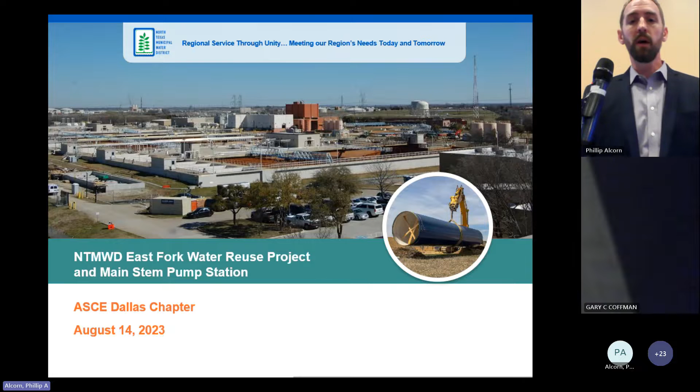So with that, as mentioned, I'm Phillip Alcorn. I'm with the North Texas Municipal Water District. We're here today to talk about one of our premier projects, the East Fork Water Reuse Project. But first, I'd like to orient you a bit to who we are at the district. We are a regional water, wastewater, and solid waste provider, serving approximately 2 million people and growing on the water system side.

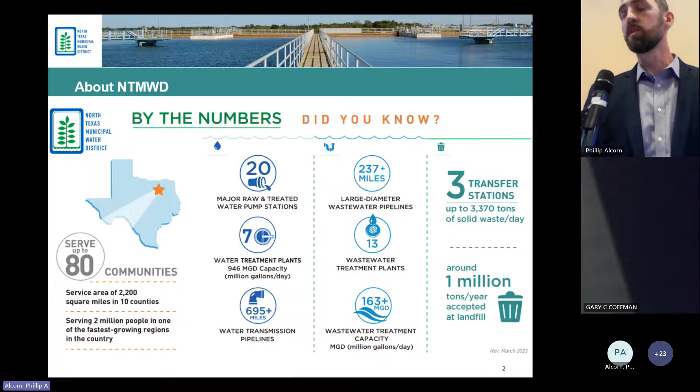So we serve mostly north and east of Dallas. I like this map because it provides a good landscape of who serves what. Dallas there in purple being central, our service area is shown there in green, again primarily north and east of Dallas. Also shown on this map are two other major water providers in the Metroplex, that being Tarrant Regional Water District there in blue, and then the Upper Trinity Regional Water District shown there in the hatched area.

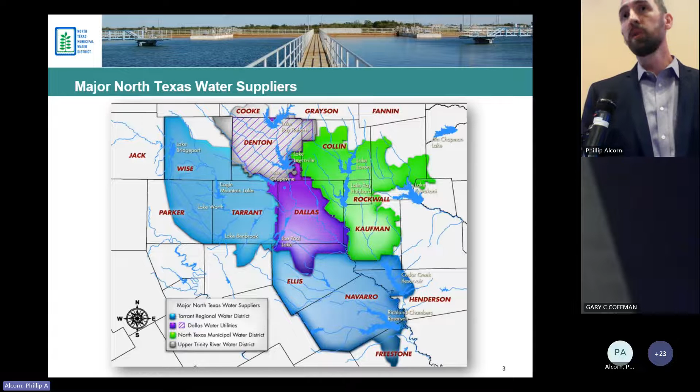We're probably most like the Upper Trinity Regional in that we are a treated water wholesale provider. So we treat water at one of 7 treatment plants and then deliver that to the member and customer cities that we serve, who then distribute that to individual homes and businesses within their service area.

As far as water supplies, we have reservoirs including Lavon Lake, Lake Texoma, Tawakoni, and Chapman Lake, from which we draw raw water supplies. Those are Corps operated and owned reservoirs. Our newest reservoir, which is owned and operated by the district, came online, began treating water this spring, and that is Bois d'Arc Lake in Fannin County to the north.

It's a really exciting project. It'll be a separate discussion, but that's the first major reservoir built in Texas in 30 years, so it's a very exciting project for us. Again, just came online treating water at our newly constructed Leonard Water Treatment Plant in the spring. But these are our water supplies in terms of reservoirs.

We also have significant reuse supplies, which is what we're going to be talking about today. As mentioned, that is reuse of treated wastewater effluent that is discharged into the East Fork of the Trinity River and the main stem of the Trinity River. We divert and then treat that through 2 pump stations and then at a constructed wetlands, which we refer to as the East Fork Water Reuse Project.

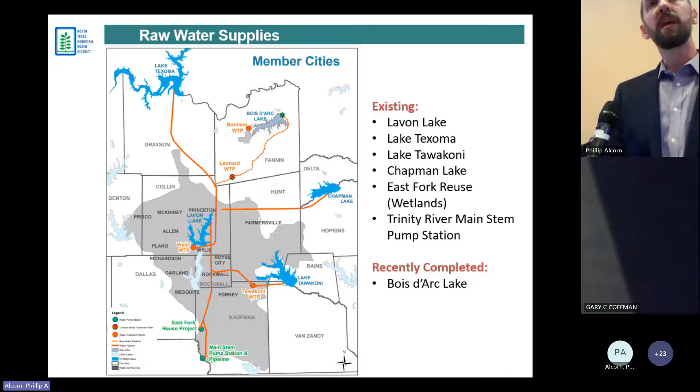I mentioned growing earlier, and we are doing just that. The entire Metroplex is growing significantly, has been, and does not show any signs of slowing down. For our service area alone, our estimates are we're adding over 55,000 people a year, and will continue over the next several decades. So we've got big challenges ahead of us as an organization for meeting water supply demand now and into the future. This East Fork project, which came online in 2009, was absolutely critical for us in terms of our ability to meet water demands at that time and into the future, especially with the recent growth we've seen over the past few years.

But I'll note here a few key points: we're currently serving over 2 million people, and we expect that number to nearly double over the next 50 years. Many of the cities that we serve, again north and east of Dallas, are some of the fastest growing areas in the country.

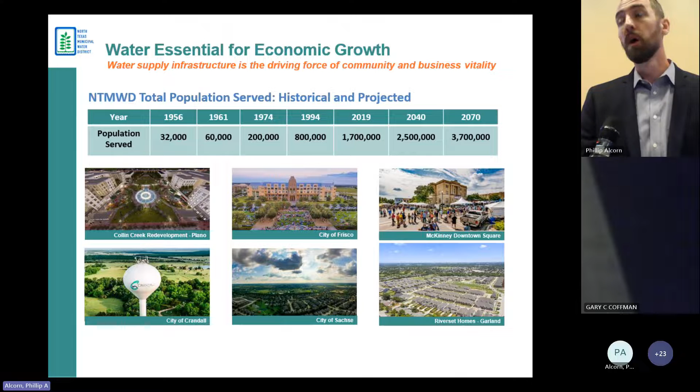We routinely see reports from the Census Bureau and other sources naming cities within our service area, and it's true across the Metroplex. So it's not unique to just us and our organization. But the water supply challenges are great for the Metroplex, and it will take a combination of solutions to meet those.

In the water world, we generally plan for a 50-year horizon. We undergo a regional and state water planning process that looks over that term. These numbers are from the Region C plan, the region which Dallas-Fort Worth lies within. These are Texas Water Development Board planning regions. As you can see from the most recent Region C plan, it's going to take a combination of water supplies to meet future projected growth and demands.

So, of course, new reservoirs like Bois d'Arc Lake will need to be constructed, but a significant portion of that future demand is going to be met through conservation and reuse, almost a third between those two strategies alone. It's a significant part of our portfolio and will remain so now and into the future as we look to additional reuse supplies moving forward.

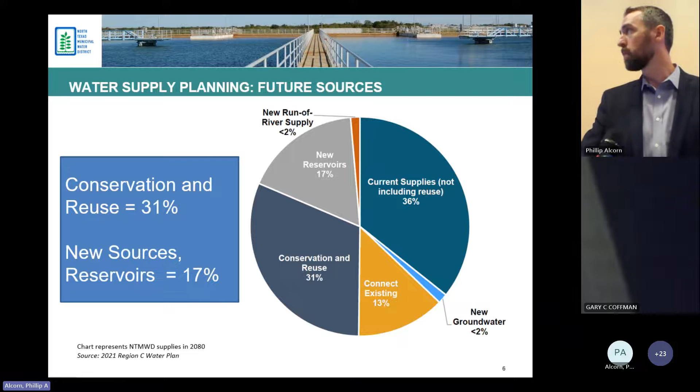It's owned and operated by the district, my organization, but there is a nonprofit center located within the heart of the wetlands. That's the John Bunker Sands Wetland Center, named for the individual who oversaw and owned that property prior to the district acquiring it, which is a really neat origin story for how the project came about.

John Bunker Sands is one of the individuals that's part of the family behind the Rosewood Corporation, and it was part of Rosewood's cattle operation, this property, prior to our developing it as a wetland. He himself had identified the potential for that site for wetlands development, and it was a fortuitous situation. We shared a common consultant that brought us together and ultimately led to our developing the project in partnership with the Rosewood Corporation before acquiring it after it was built.

This nonprofit center is really an extraordinary place. It's open to the public. Their focus is on education, both for adults, but largely for school groups. We have schools that come out regularly to visit the center and learn about wetlands, science, water supply, a range of topics. But it's also very popular with the birding community.

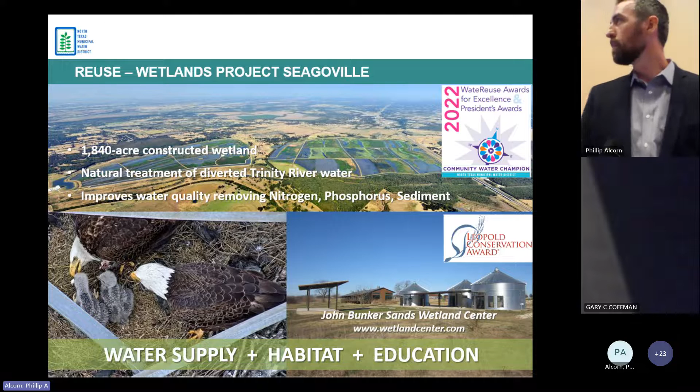So to orient you to how this wetlands operates in terms of water supply and what it means for us, you can see Lavon Lake at the top of this graphic. Below it, along the East Fork of the Trinity River, is Lake Ray Hubbard. If you follow that East Fork south, that's where our constructed wetlands is located. It's adjacent to the East Fork of the Trinity River, south of Ray Hubbard, but upstream before the East Fork has a confluence with the main stem of the Trinity.

We divert water directly out of the East Fork of the Trinity River into those wetlands, and those volumes are based on treated wastewater effluent volumes which are discharged into that watershed upstream. Those are facilities that we operate or have agreements in place with, but it's largely our service area, so it's water that we deliver that we're reusing after it's been used and treated at those facilities.

We also have an arrangement with the city of Dallas. For those facilities that discharge into Ray Hubbard, the city of Dallas releases those equivalent volumes downstream so that we may divert it from the East Fork into the wetlands.

We also recently completed construction on a new pump station on the main stem of the Trinity River. So in addition to diverting volumes from the East Fork, we also divert volumes from the main stem of the Trinity, pipe that upstream into the wetlands, and then all the water that flows through that wetland system, both from the East Fork and the main stem of Trinity, after it works its way through that system, is pumped up back to Lavon Lake. We pump that water into the upper reaches of the eastern arm, which allows time for that water to blend, and also additional detention time for treatment before we ultimately bring it into our water treatment facility located at Wylie.

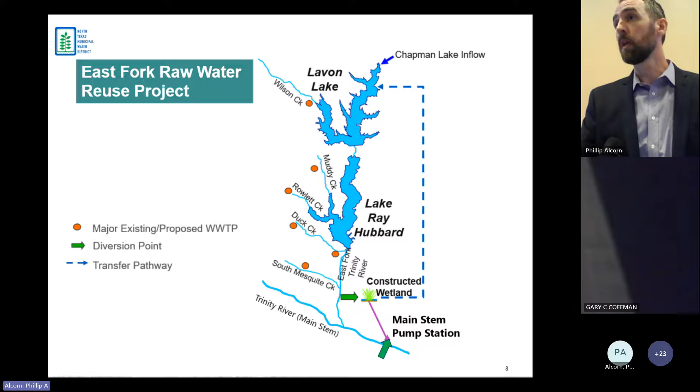So a bit about the main stem pump station. The wetlands have been online and operating since 2009, but this is our newest addition to that system. It was fully operational 3 years ago in 2020.

The distance between that facility and our East Fork wetlands is approximately 17 miles. It's over 40 miles that we pump it from the wetlands up to Lavon Lake. So we've got significant miles of large diameter pipelines to convey that raw water up to the wetlands, but also ultimately up to Lavon Lake.

As far as capacity here, this pump station can deliver just over 100 million gallons per day, but in terms of a reliable supply, it represents 50 million gallons per day. So if you combine that with what we can reliably divert out of the East Fork of the Trinity River, we can get a reliable supply out of this system of 90 million gallons per day. Now, that's what was the basis for the design for the wetlands itself.

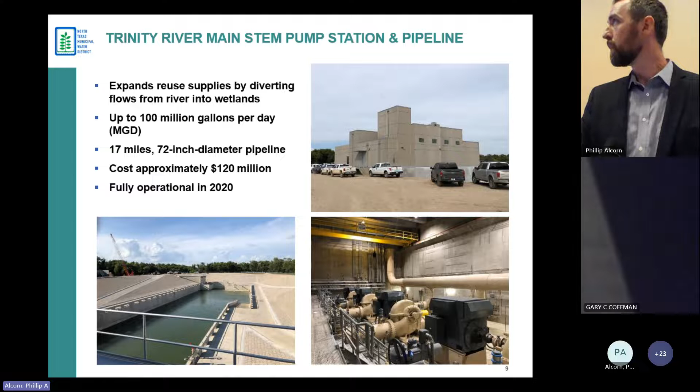A bit about water rights. So we have rights to those volumes in the East Fork, which we divert directly into the wetlands from the East Fork of the Trinity River. We obtain water rights to do that. It was actually based off of our water rights for Lavon because that's where the volumes are ultimately discharged to.

But there are some unique conditions within that permit that are intended to help ensure there are adequate flows within the East Fork of the Trinity River for the benefit of downstream water right holders, but also for biological and ecological purposes. So we bypass certain flows within the Trinity River Basin and also have requirements for maintaining flows within the East Fork and the main stem in terms of our pumping operations.

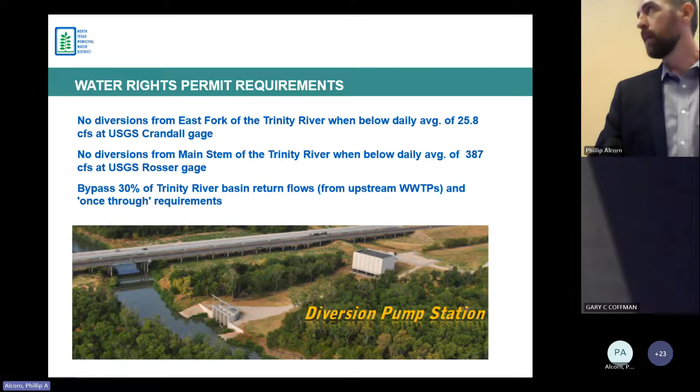So I like to show this slide. This is my last slide, but it really, in my mind, gives a good comparison and perspective for what this represents to us in terms of a water supply.

So the reliable supply I mentioned out of the East Fork project is approximately 90 million gallons per day. Compare that to the firm yield of Bois d'Arc Lake, which is our newest addition, our newest reservoir. That's the equivalent of another lake, and at a fraction of the cost, a fraction of the size, and a fraction of time to permit and construct. So reuse for us has been absolutely critical, but it's also been a very cost-effective solution to making additional use of our existing supplies and meeting those demands we're seeing within our service area.

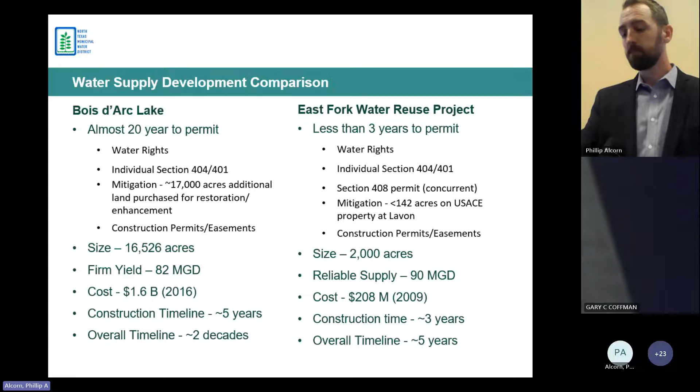And at this point, I'll transition to Loretta, who's going to talk about operation and maintenance of the system itself.

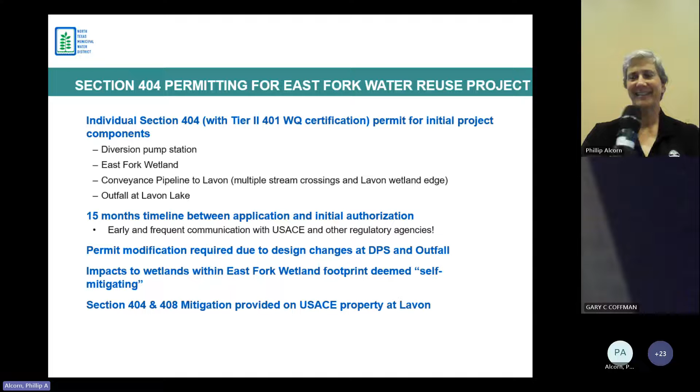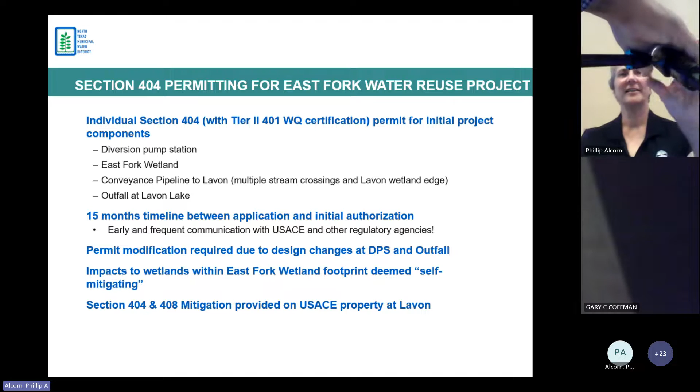First, I'm going to expand a little bit. Can you help me out, Paige? Testing, testing, testing. Okay, all right.

We're going to expand a little bit on talking about the permitting for the project. The initial project components, the diversion pump station on the East Fork, the East Fork wetland, the conveyance pipeline all the way back up to Lavon, and the outfall at Lavon Lake, the permit required was an individual 404 permit.

Of course, you have to have the water quality certification permit from TCEQ that goes along with that. It took us 15 months from the time that we actually submitted the complete permit application to where we had the permit in hand and were able to start construction. So we were working on all the permitting as they were continuing doing the design, and we're coordinating very carefully with the Corps and all of the coordinating review agencies during that time.

As soon as we got the permit, I had a couple of design modifications that the engineers had done and didn't bother to convey to me, that we had to do a modification of the permit because we'd been working so closely with both the Corps at the regulatory branch as well as with the operations people at Lavon. We were able to continue construction during that time while we were working on the modification of the permit.

The impacts to wetlands that were there on the ranch: Bunker Sands had already done some restoration and created some duck habitat cells. That's really what threw us into the individual permit. So we had quite a bit of marsh type wetland there that was being impacted. That was determined to be self-mitigating because that's what we were creating again with our constructed wetland was the marsh area. But we also had impacts to waters of the U.S.

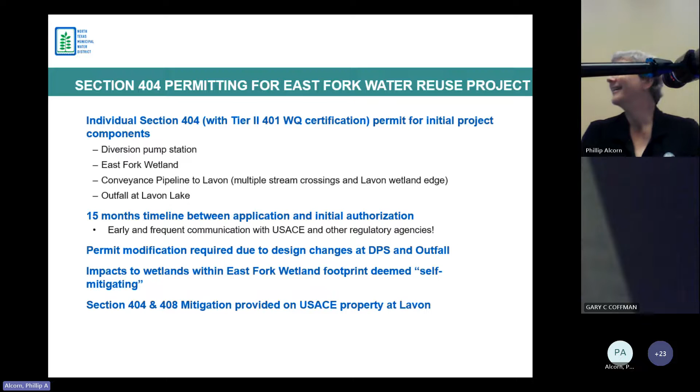Permit. That's required because you had crossing with the pipeline of the federal Corps flood control levees, as well as crossing with the pipeline on federal property up at Lavon Lake. So that was done concurrently with the 404 permitting, and we were able to do all that mitigation.

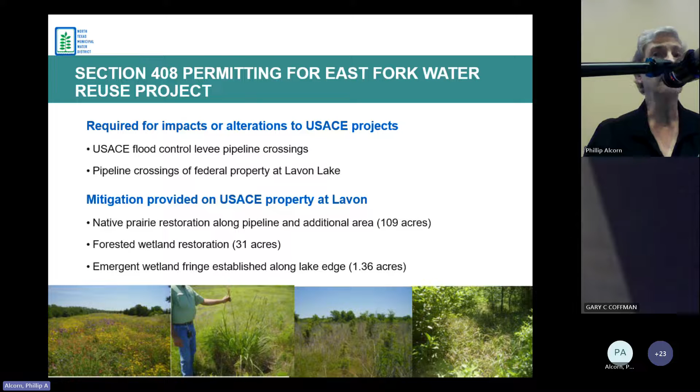The mitigation that we did up there at Lavon was native prairie restoration of 109 acres, as well as some forested riparian area wetland restoration along one of the drainages going into Lavon, and then a little bit of emergent wetland that we had to do within one of the cove areas. That was actually only a little over an acre, but it was some of the hardest mitigation to do because Lavon was about 15 feet below conservation pool at the time we started the project. We had to wait about 4 years before lake levels rose enough to where we could actually do some wetland plantings in that cove area.

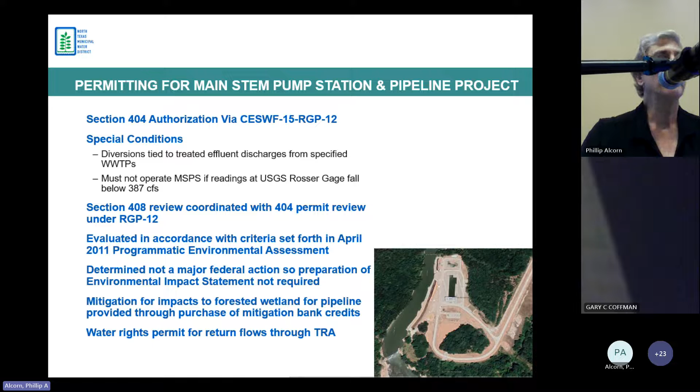We were able, with the Corps crossings of the Corps levee for the pipeline, to use a programmatic environmental assessment that the Corps had developed in 2011. So it was not a major federal action, didn't require us to do an environmental impact statement. In fact, they fairly streamlined it, so that part went through pretty quickly. We did have minor impacts to a small forested wetland along the pipeline route. For that one, we were able to buy mitigation bank credits.

Going back to the wetland, if you look at the site at the Seagoville Ranch where this was developed, this ranch had been producing crops and cattle for over 100 years. And that is something that, as we're out there, we recognize we really don't have much in the way of a seed bank, and we needed this project out quickly.

But one of the key things in looking at this site is when it was being used for producing all these agricultural crops, they'd actually developed agricultural levees around the north and central section, and then also had the Corps flood control levee around the south section. So there is some flood protection of the site. It's not 100-year flood protection, at least not on the north section, but we do have 10, 15, 25-year flood protection. We're not going to be flooding the wetland, which was critical.

You can see the distance and constraints that we had with the site. We actually have 3 different sections: the north section, central section, and south section that was developed.

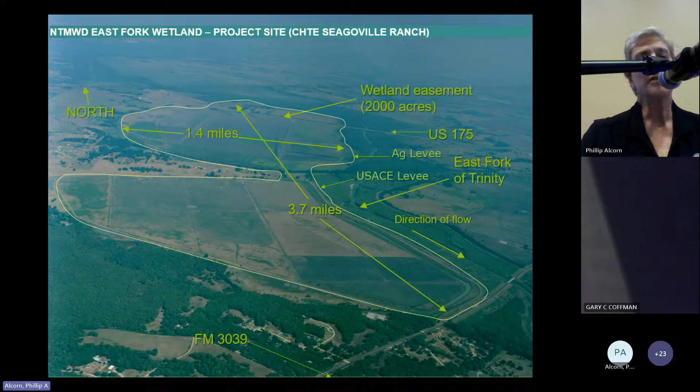The major project components included the diversion pump station on the East Fork Trinity River that Galen mentioned, the constructed wetland itself with 1,840 acres of wetted surface area within the 2,000-acre easement, the conveyance pump station that pumps water back to Lavon Lake, the conveyance pipeline of 43.5 miles at 84-inch diameter, the John Bunker Sands Wetland Center located centrally within the site where they do the educational component, and then the main stem pump station and pipeline that came on in August of 2020.

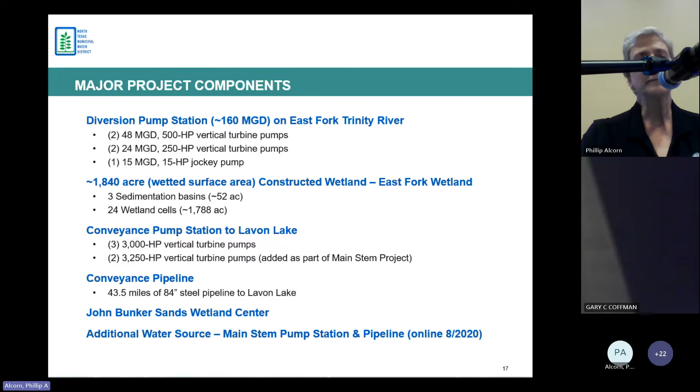You can see where the diversion pump station is on the East Fork Trinity River, and the water that comes from the main stem pump station comes just past that pump station, and both of them are commingled in the splitter box. The splitter box discharges to 3 sedimentation basins and then to 3 small wetland cells in the north section. That's gathered and has to be conveyed through culverts under Highway 175. It flows through the central section in 3 wetland trains, has to be gathered again into a channel, and then culverts under the Corps levee, then distributed to 4 wetland trains in the south section. Then that flows down into the holding pond at the conveyance pump station, where it's pumped back to Lavon.

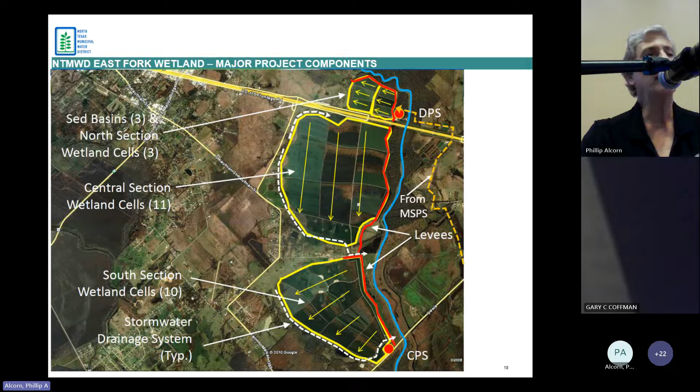Okay. Oh, I missed one.

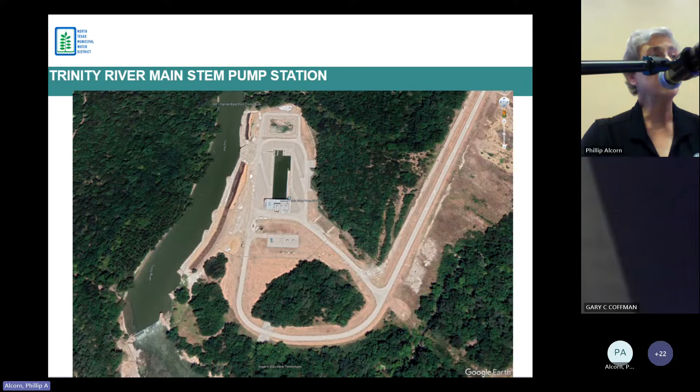This is just a quick picture of Google Earth from the main stem pump station. It's a little different, it has a forebay down there. Notice there's the lock and dam structure just downstream from the intake. This was a key factor in locating the pump station here, because that lock and dam maintains a steady pool in the Trinity River for the intake to be located within.

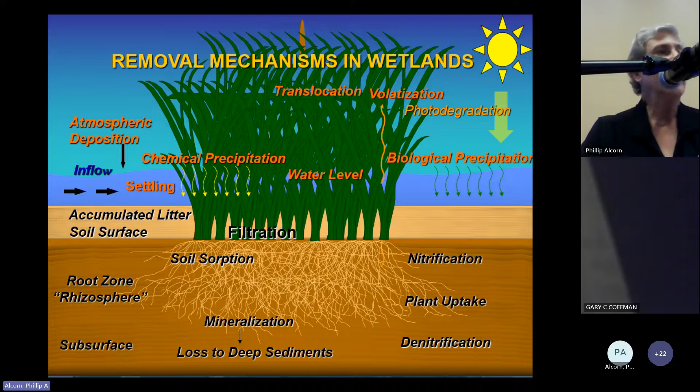Within the wetland, there are a number of different removal mechanisms that function synergistically to provide water quality improvement, primarily focused on removing suspended solids and nutrients, nitrogen and phosphorus. All of these actions work together, and sometimes separately, but sometimes things can happen within the wetland as well, which we'll talk about in a minute.

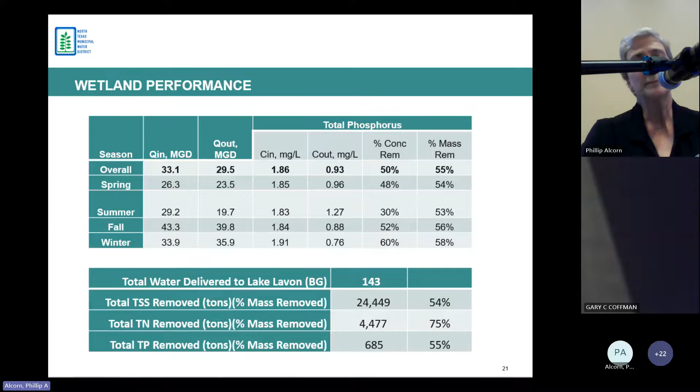People ask me, well, this is a natural system, so it really kind of operates itself, doesn't it? Well, yes and no. There is ongoing operation and management required within a constructed wetland. You don't have the concrete, steel, air blowers, and other mechanical things that you have at a conventional plant, but we do need to manage water levels within the cells to make sure we're not having adverse impacts to the aquatic vegetation. You need to manage the flow, balancing or proportioning between the trains so you're effectively using the treatment area, and you need to be monitoring water quality.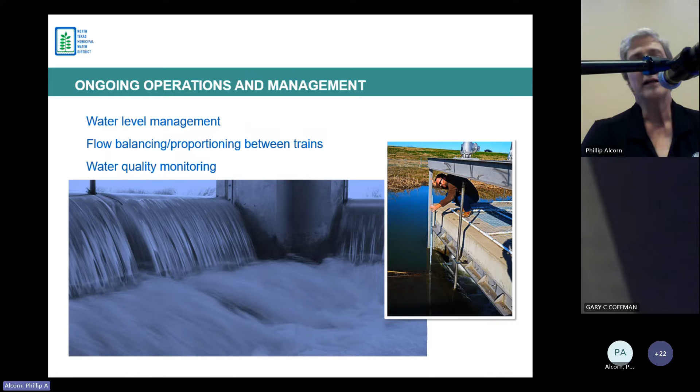Then you have vegetative cover. Again, the plants are a very key component of this wetland. They provide structure within the water column, as well as organic carbon for the microbial population to colonize and grow on. When we have issues or impacts to those plants, we do remedial planting, and that's something ongoing in different areas.

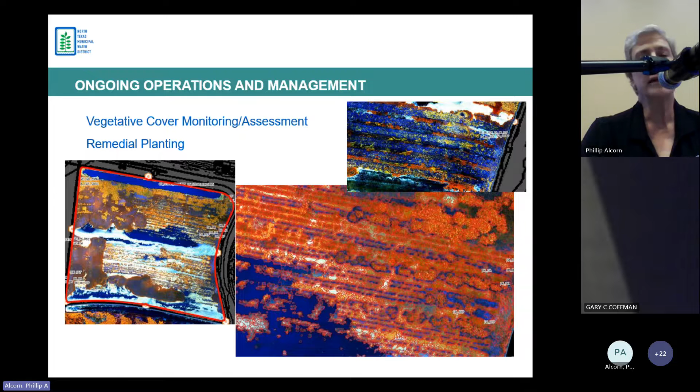For instance, where we have wildlife impacts, we have woody vegetation control. Willows and cottonwoods are really not desirable within the marsh areas because their roots can penetrate through the clay bottom, and they also lose a lot more water through evapotranspiration. In the wintertime, we do prescribed burns that remove a lot of the accumulated thatch from the tall plants, generating robust regrowth in the spring, which really helps pick up more nutrients.

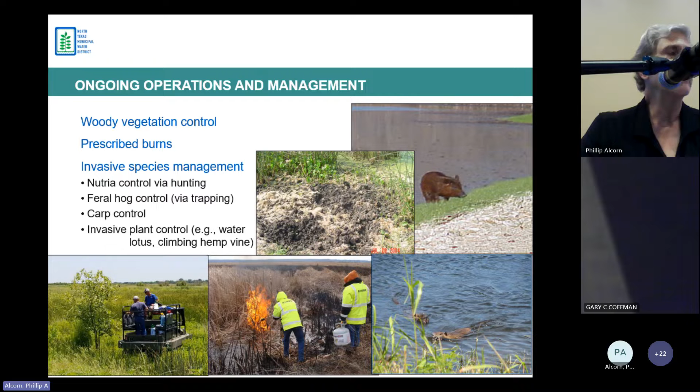You have a lot of invasive species management. In particular, we have a lot of nutria that came in first. The nutria are very destructive to the plants as well as to water quality. We also have a lot of feral hogs. The nutria are controlled through hunting, and for the feral hogs, we now have an active trapping program underway to try to keep them in control.

Looking at carp control, as I mentioned, the carp stir up the bottoms a lot, which can be very detrimental to removal of suspended solids and phosphorus. One way we treat that is by draining down a cell and using large pumps to pump out the deep water zones, and we have a number of predators that then eat the exposed fish. You can see the picture on the left: TSS before treatment was 135 milligrams per liter, and after treatment it's 13 milligrams per liter. The carp have a significant impact on your suspended solids.

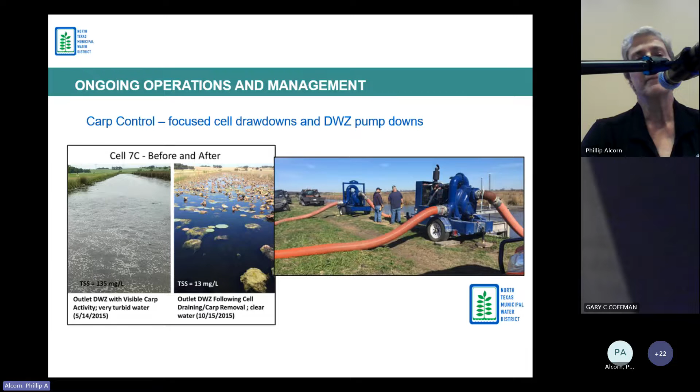And then again, with the vegetation and the different animals we have in there, or sometimes with different flows, we'll have short circuits that develop. If you have your flow going through a short circuit, you may have 80–90% of your treatment marsh that's not functioning very well. Some of that we can treat. If it's a fairly minor one, we'll treat with remedial planting. Larger scale ones will require some regrading and activity to block that short circuit.

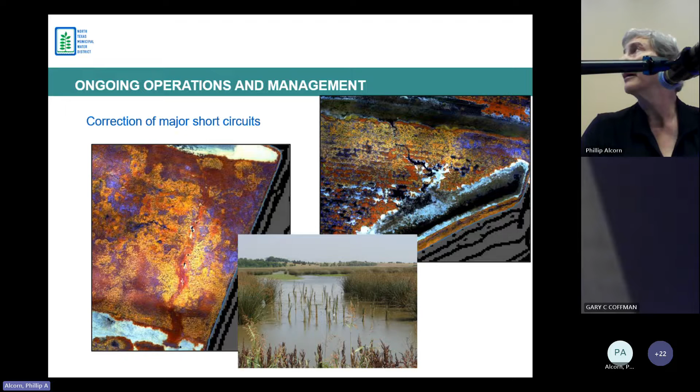Levee embankment and road repair. When you've got animals out there, the nutria like to burrow into the levees, and the picture in the upper left is where they basically built their tunnels and mined within one of the levees up there in the central section. The big hole you see on the upper right is where a culvert pipe separated and the dirt fell in.

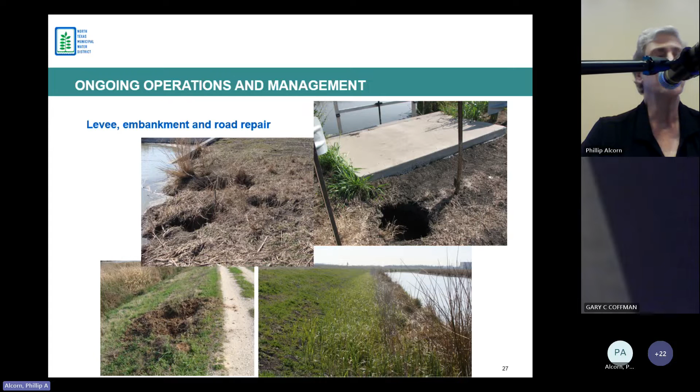Now, if there's any questions, Galen and I will be happy to try to follow up with you.